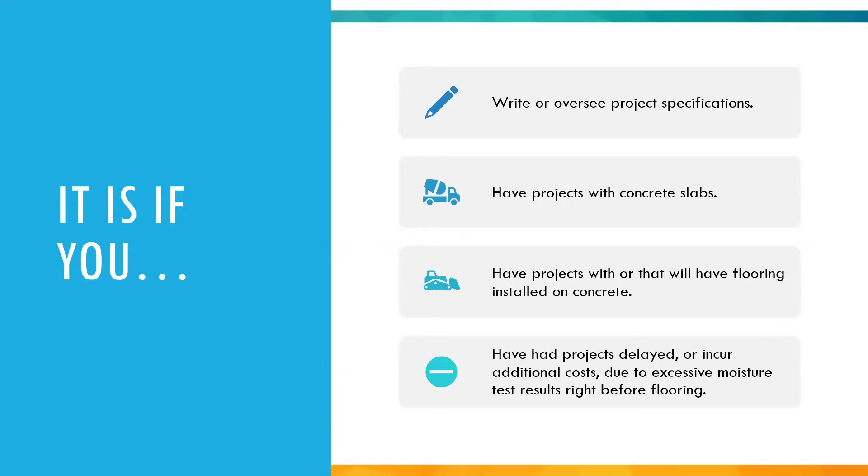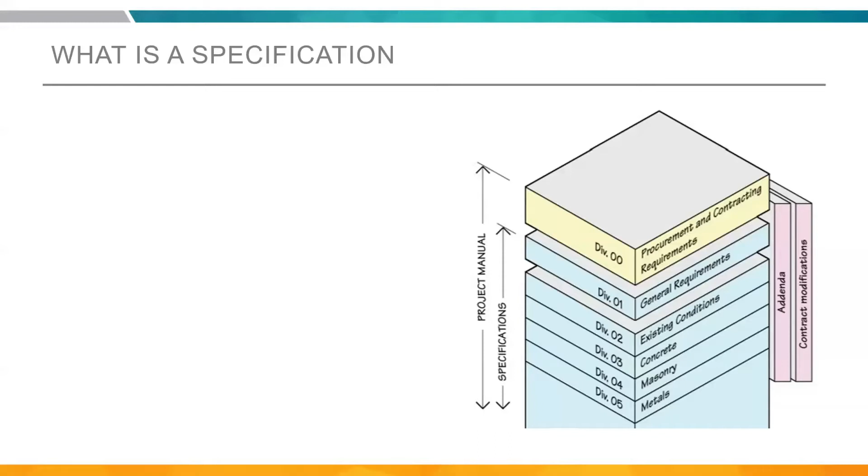Now, specification. So this title, Specification Strategies to Eliminate Concrete Moisture, seems pretty bold, throwing it out there. But before we go on, I really want to set the stage. What our frame of reference for a specification is, and this is not to impugn anybody's intelligence. It's just, again, some really hardcore reminders of really what the specification is supposed to be. Now, if you get into the CSI literature, they'll describe a specification as the written embodiment of the work, the project. But one of the documents, a document specifically written for specifiers, describes it as the written communication of design intent to fulfill specific project requirements. So if you take that particular description of a specification, regardless of what it is you design, you can wrap that definition around anything, whether it's civil, whether it's structural. You can still apply that to that design.

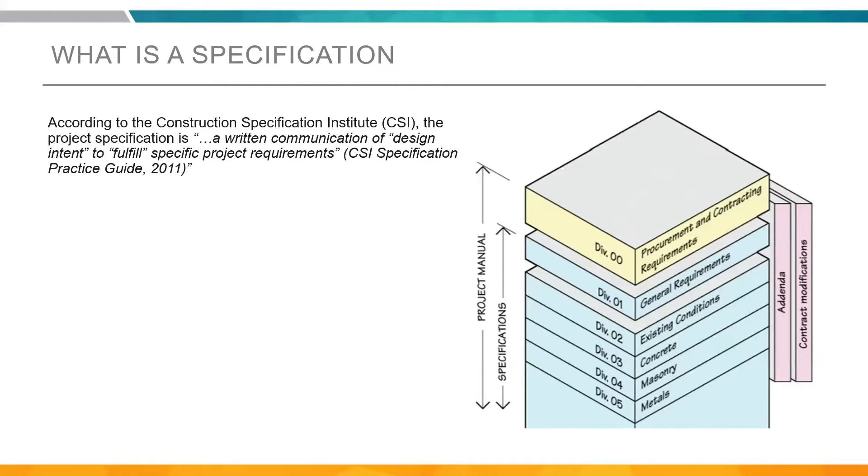Now, another perspective, getting into the actual project. And so now we're going to differentiate between a specification that is flat, lifeless, an office master, a third-party subscription service like MasterSpec or ARCOM or SpecLink, and nothing against any of those organizations, but when those specifications are residing on their system, or you have an office master residing on your server, that's not really the specification we're talking about. We're talking about the project specification, a named project and a project manual. And the reason why we differentiate is because in many cases, once that flat, lifeless spec goes from the server to a project, it takes on legal ramifications. It becomes part of the contract between the owner and the contractor.

And one of the often used documents under general conditions, specifically for structures, is the AIA A201 general conditions. And in that document, it clearly states that the architect and their consultants, perhaps a lot of you out there, shall be deemed the author of the specification. So put another way, it does not matter where the source came from for a particular specification. It does not matter. For that project, the architect and their consultants wrote it. So just keep that in mind from a legal perspective. The way something becomes a contractual obligation for a specification, it doesn't matter if it's a copy and paste.

It doesn't matter how it got in there. For that document, for that project, the architect and the consultants wrote it. And because of that, there's some legal safety net implicit due to the Spearin doctrine going back almost 100 years that accrues to the contractor.

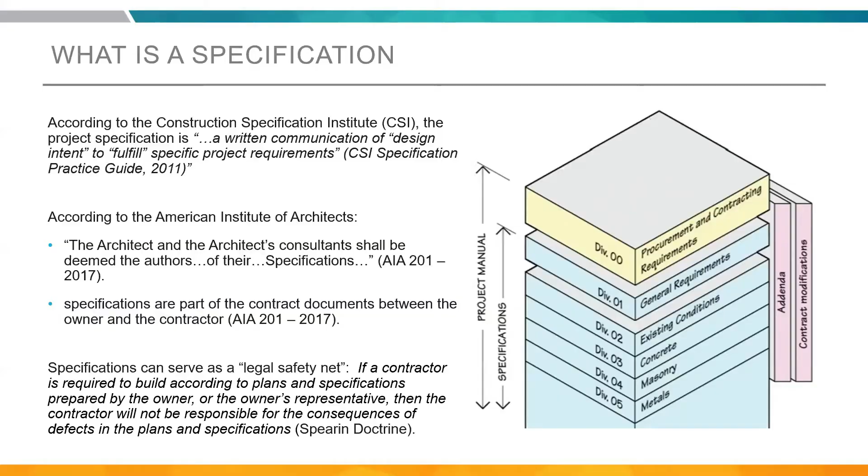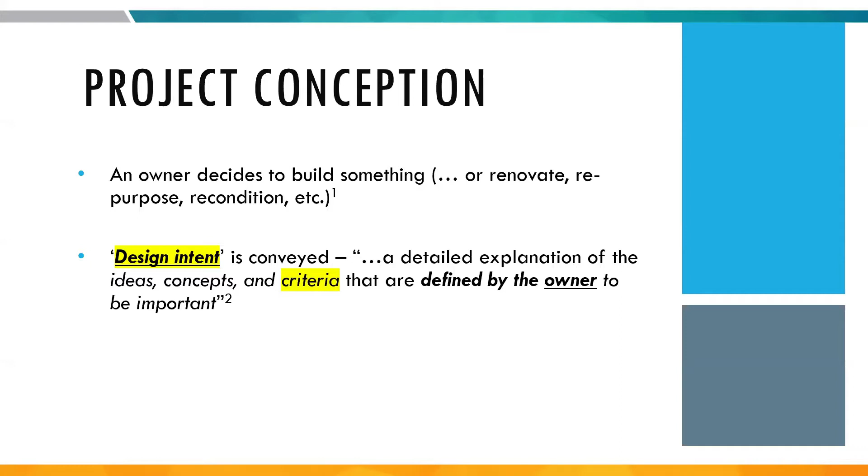Okay, so what drives all this? Well, in the beginning, somebody decides to build something. A client decides to build something, renovate something, repurpose something, build something from the ground up. They come to a design team. The design team designs the structure, and so somebody conceives of a project, and it's in the process of specifications. It's that early on that the design intent is supposed to be conveyed. It's supposed to be expressed in those specific project requirements.

And again, from the concrete world, a lot of things are designed in a silo where you have the 03 specification section done possibly by an offsite consulting engineer, and then at some point in the future, they get married up with the other spec sections of the project. But that's irrespective. The whole design intent and the requirement for the owner, they don't see it that way. They see it as a seamless process.

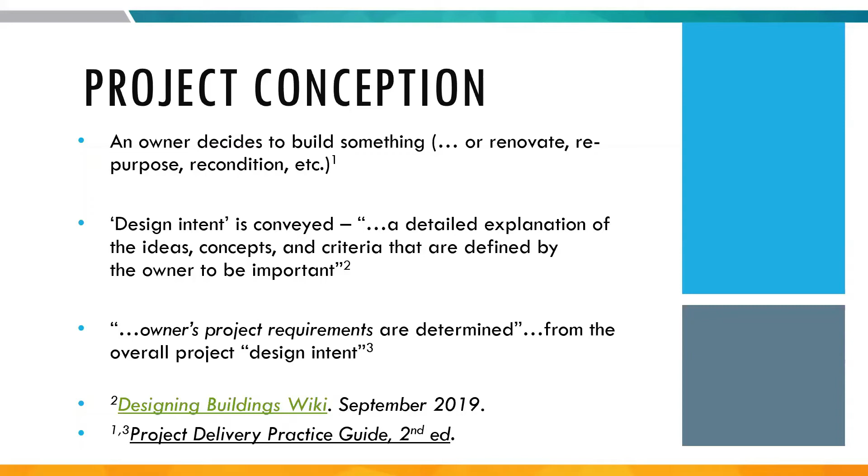And so if something's missing across any of those sections, or if something's not spelled out, then it could lead to unfulfilled expectations. And the better those requirements are understood, i.e. time, delivery, expectations for the project schedule, the higher probability that the owner is going to be satisfied, that the project is going to fulfill what they expect. It's going to be a success. And if something is not effectively addressed, the higher probability that those requirements will not be fulfilled.

And it's not just enough for the contractor to build according to the project manual. That's pretty much defined as quote unquote all claims resolved. But the literature for projects tells us that it's not just enough for the contractor to do all that, but they also must do it on time and within budget. And if any one of those three things are not satisfied, then by definition it is an unsuccessful project.

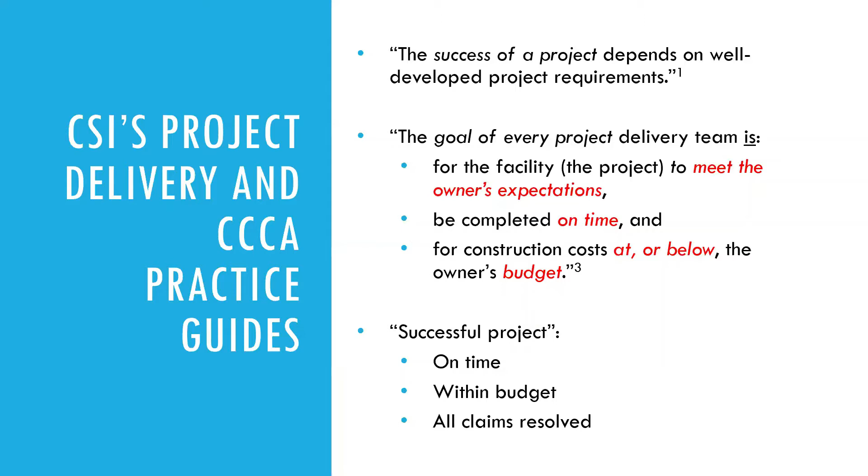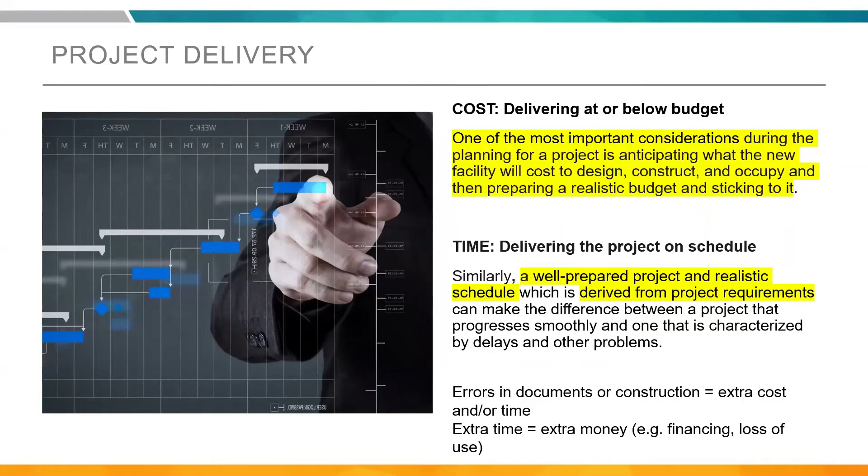So the completeness and accuracy of the specs is critical to be able to fulfill those three things, because not only does it affect whether or not the resulting end product is actually what the owner wanted, but the specifications and drawings are also used for bidding. And if they're incomplete, there's a good chance that something may be missed, something may not be taken into account, leading to maybe future change orders and cost, or extra time in the contract. So again, accuracy and completeness are critical for overall success of the project.

Now, just bear with me, because again, I've got to try to marry the concrete side with the flooring side. And here's some examples of how things start getting skewed once a lot of you have done your work and left the project. First of all, as a reminder, the architect and their consultants are the author of the spec. The other thing the spec language reminds project design team members is that just because a material is inexpensive doesn't mean that being able to incorporate it into a project is also inexpensive.

As an example, there are many different kinds of flooring systems that are fairly low cost for installation and also acquisition. But when it comes time to install, if there's a high moisture test, then you have to go to moisture mitigation. That cost for flooring may double, triple, or quadruple. That's why you get called to those meetings, because that project is staring down the face of a very, very expensive topical moisture mitigation system or project delays.

Another thing the literature tells us is beware of bias that might be embedded in manufacturer specs. Now, regardless of what you specify, this pertains to all manufacturers, obviously that relate to flooring as well. But it's a reminder: beware of bias. Actually read the wording and ask yourself, is this really a requirement? Or is this a means for that particular manufacturer to try to drive another value line through a component? In flooring, it might be that manufacturer requires their adhesives to be used.

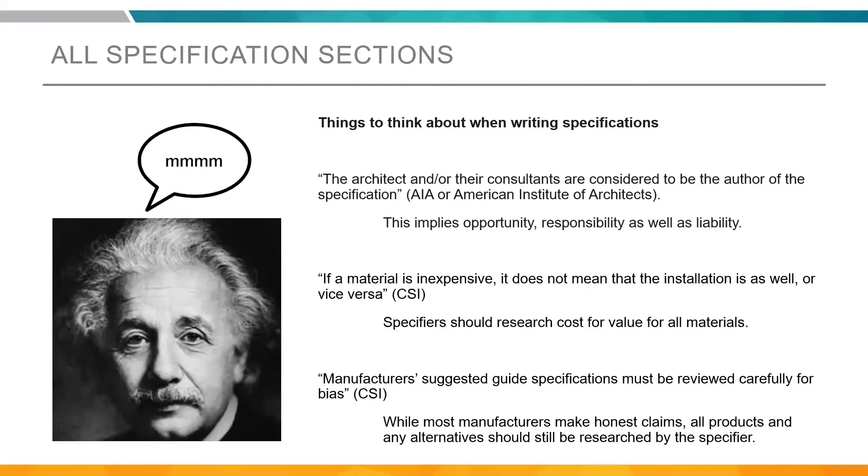Well, is that really a requirement? Because there's only a few manufacturers of adhesives on the flooring side, most of them private label for all the large manufacturers. Or is that just an attempt by that manufacturer to sell another SKU? So just keep that in mind. There may be embedded bias that you must be aware of and take into account as you look at specs, especially if you get it straight from a manufacturer or a third-party subscription.

Now, this does have pertinence to basically every single spec section. The literature of the specifications says that reference standards are incorporated as if they were written in their entirety into the spec. So keep that in mind. I know, especially on the concrete side, there's a lot of references, and a lot of them have to be there. But just keep in mind that a reference standard incorporated has the same legal effect as if it was copy and pasted in its entirety.

So if things start going down the path during a project and questions start being asked, things like install per manufacturer's instructions, if those instructions weren't fully looked at prior to moving down the project, don't be surprised if something manifests down the road that people didn't expect.

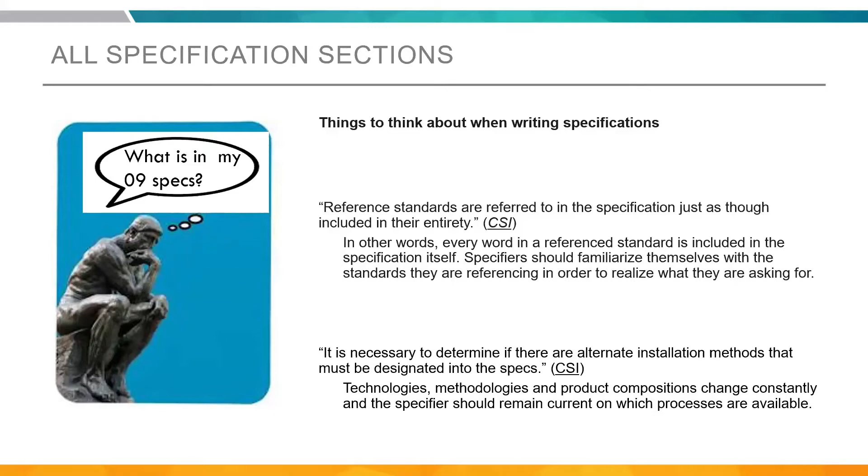And then lastly, installation methods. Again, more slated to flooring, but it does relate back to the concrete side. What the specification literature says is, if your project has conditions that do not meet the manufacturer's requirements, change the installation instructions. As an example, if the concrete moisture is reading too high, what the literature for the spec writer says is we'll change the installation instructions. So all we're trying to do is step back and take these things into consideration well up front in design, so these things don't occur too late in the project on the back end.

Now, again, if you've ever been called to one of these meetings before, heard presentations before, or been involved with projects before, you may have been faced with this comment: we can't install a floor because we can't get the warranties. This is probably one of the most prevalent comments I've heard in the past 12 years. Well, if the concrete moisture is too high, we can't get warranties. So I'm going to address that.

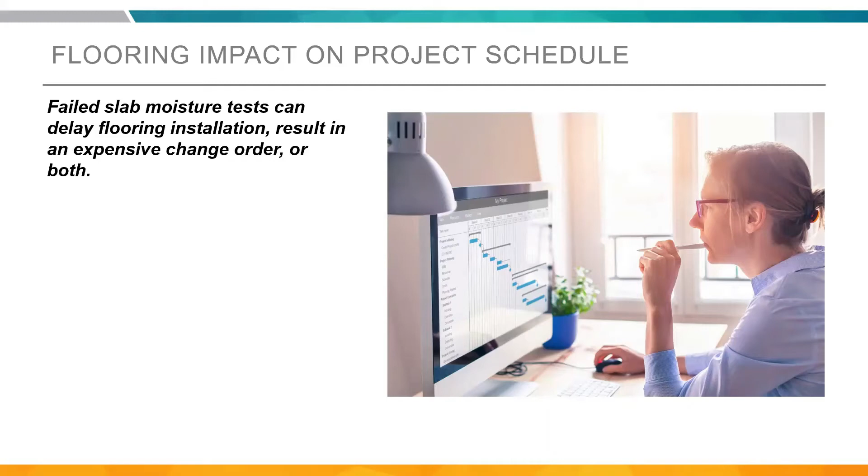Well, the reason being is now the press is on because flooring isn't just its own sub-element that does not impact other elements. It is its own element as far as the macro critical path. So a high moisture test can delay one of those little blue lines. But flooring in the overall schedule happens very close to substantial completion. In some cases, it's one of the last things that occur because the project doesn't want all the other trades walking in and trashing the floor. So if that flooring is delayed close to substantial completion, not only does it delay the flooring install, but it can also delay the overall project delivery.

I know of a project in the northern part of Cleveland where the flooring was delayed for over 5 months. The university did not have the moisture mitigation money. They decided to wait and retest. A 5-month delay, which equates to potentially almost losing that facility for 2 semesters. So just think about the cost of that.

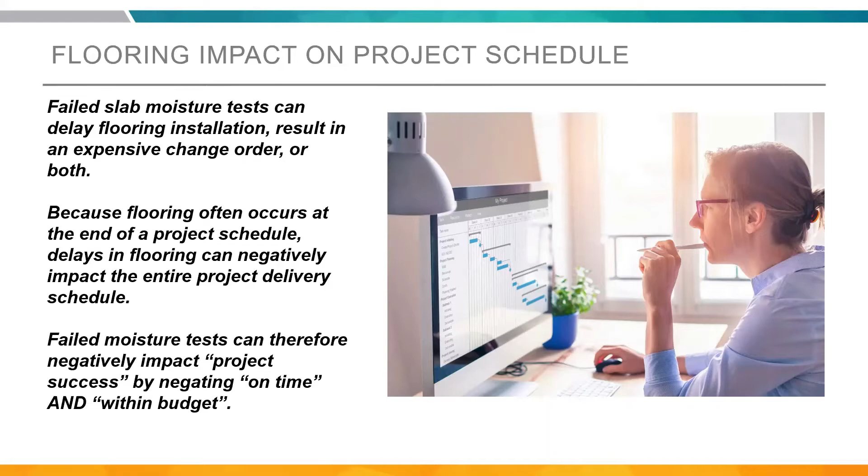Again, think of yourself, if you've ever been asked to one of those meetings, you're sitting there, or people from your organization are sitting there, and you're hearing the project manager or the owner's rep saying, we expected to start flooring 3 months ago, and this moisture is still too high. That's why it's so critical, really, to think about this in the specification, in project conception, not right before flooring. Now it's too late.

Okay, so I mentioned some references. What kind of references are we talking about? Well, on the flooring side, there's a lot of references that come into play. Basically, every manufacturer of flooring has their own reference. There's ASTMs out there. And a lot of these are written by consensus bodies. Now, granted, a lot of you have done your work and moved on, but now this is what's starting to play out with you not being there. And what people don't realize is a lot of these organizations are made up by the same manufacturers.

So it's the flooring industry that came up with the idea that you have to test for moisture prior to installing flooring. It's the flooring industry that sends people to these various organizations. I mentioned I'm on the ASTM for flooring, and that's ASTM F06 committee. And that's like 156 people, most all from flooring manufacturers, adhesive manufacturers, moisture mitigation manufacturers. So in other words, they write their own standards. They write their own resources. Just like if you go to ACI, there's a lot of concrete and engineering people, as it should be.

But again, keep this in perspective. The flooring industry was the one that came up with the need to moisture test prior to installing flooring, not the concrete world. And the flooring world writes the references and the ASTMs they hold themselves accountable to. But despite all that, and despite those being consensus documents, in most cases, the individual manufacturer's literature actually is the one that takes precedence. And so, regardless of what kind of building you may be involved with, if they're installing flooring, there's probably something moisture sensitive.

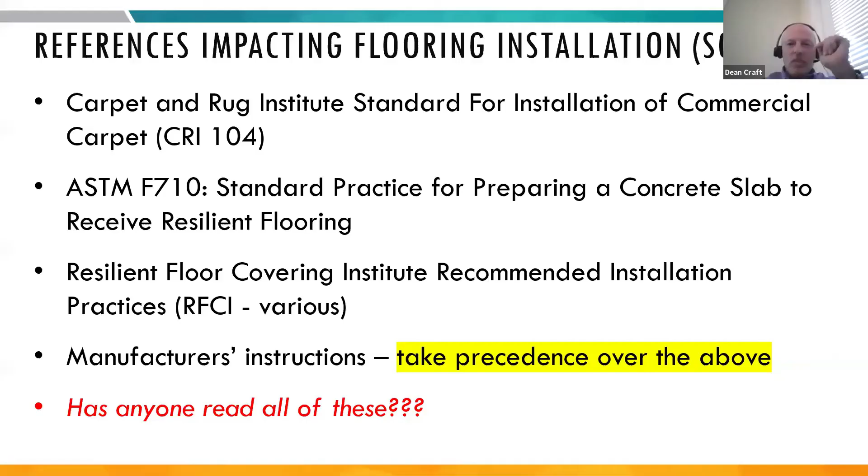So what test are we talking about? And so this is where especially the engineering minds out there, the process folks out there, start really paying attention. Okay, one of the things I was talking about when there was a little bit of difficulty there is that the references, at least from manufacturers, are basically written by the same manufacturers. In other words, they go to the committee meetings, not unlike ACI, but just keep that in mind. So that standard of care for testing for moisture derives from the flooring industry, not from the concrete industry. The quote unquote standard of care for setting a certain limit also comes from that industry.

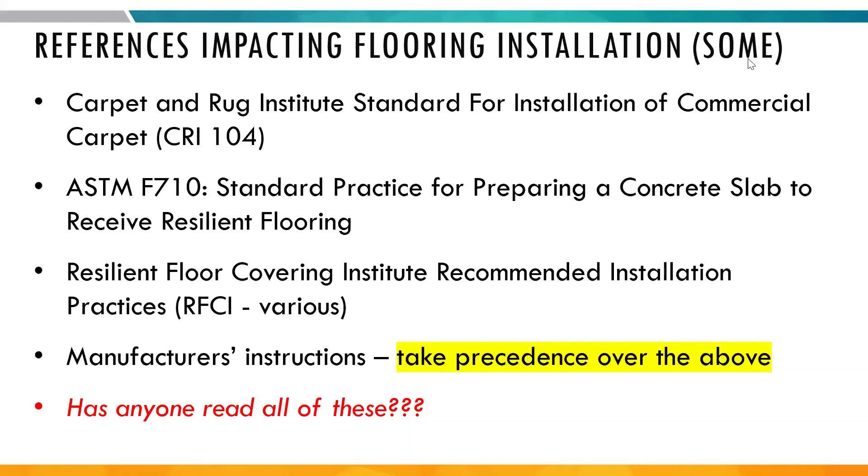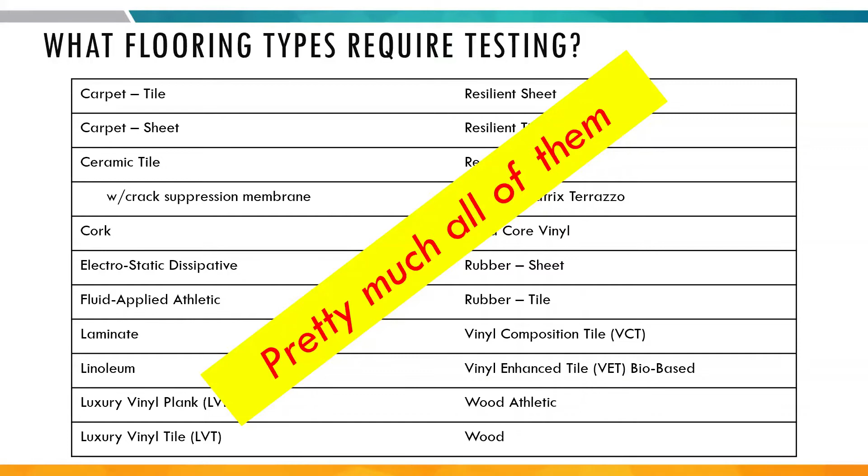So again, keep that in mind, that when you get asked questions about why your concrete can't perform to something, the concrete industry didn't come up with that. The flooring industry came up with that. And pretty much all flooring is susceptible to some moisture limit. So basically, if your feet touch it, it's not bare naked concrete, then there's probably a moisture limit. So the moisture tests you've probably heard about are the calcium chloride or the in situ probe test, the F2170 RH test. The most often used is the relative humidity test.

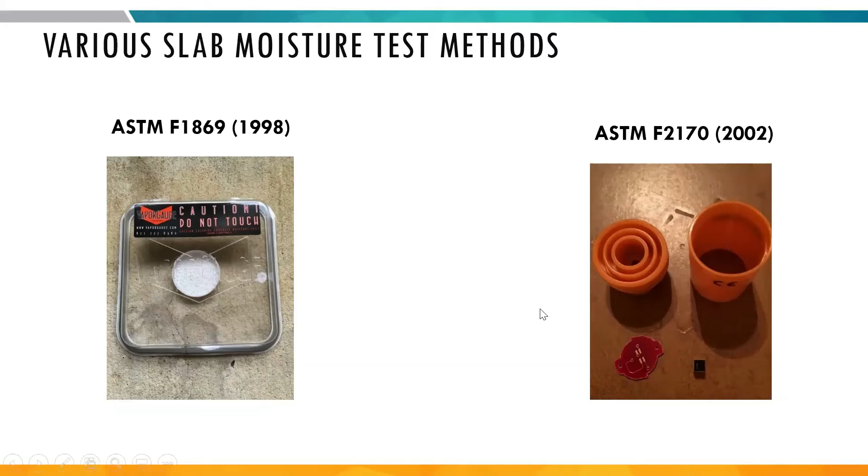And again, 1 per 1,000 square foot. So just take a quarter out of your pocket, if you have coins, and put it down on the ground and say, okay, that's where the test goes. Now, not only is that something that's codified into the ASTM, the area, the size of these devices, but this is what the standard says is supposed to be the climatization.

When these tests are occurring, and I know this does not occur in most cases, so just be aware, if you go to a job site and they're doing these moisture tests and it's not acclimatized, then those results are invalid. Whoever's doing those tests is doing them wrong. And I'm pretty sure you've been called to job sites or involved with projects where you know for a fact that the space is not acclimatized, but they're already doing moisture tests. Those results are invalid. The standard says it must be at the conditions of occupancy beginning at least 48 hours prior to the test through the conduct of the test.

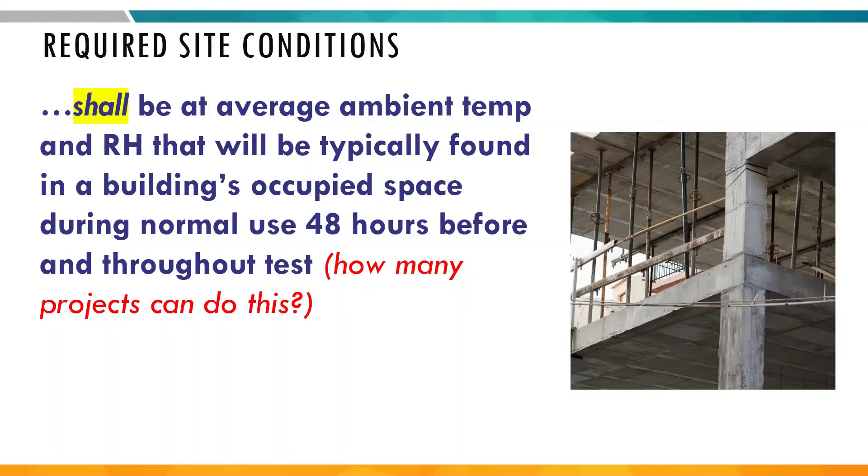This is not torpedoes blowing in heat, elevating the humidity. This is controlling the HVAC. This is controlling the humidity and the temperature. Also the substrate temperature. So especially now we're in colder weather, if you're on the second or third floor and they're testing for moisture, even if that space is acclimatized but the space below is not, measure the temperature of the concrete. The temperature of the concrete is also supposed to be at occupancy conditions, not much colder, which is usually the case.

Now, why did I spend so much time on the size of the device itself? Because the standard says that not only are you only testing the exact time of the test, that instant point in time, but also you're only testing the exact location. So all that's being tested, per 1,000 square feet, is less than the diameter of a quarter in that 20-inch by 20-inch square. So as we think this through, and think about how this relates to flooring and adhesion warranties and moisture warranties, all you're testing in most cases is less than the diameter of a quarter.

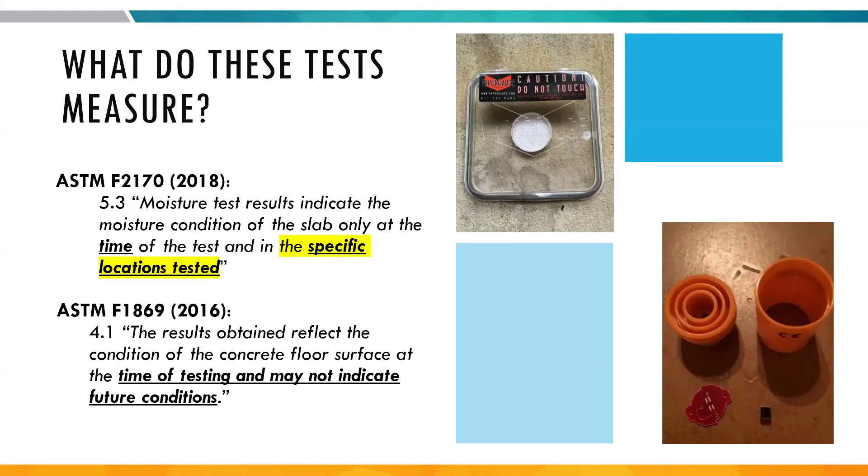Now, a big misconception across a lot of attendees to the presentation. I've been asked this many times. Anecdotes or vignettes, people say, well, we placed concrete in the summer, had a dry winter, the fall was a little wet, then we started trying to get the building closed in, some rain, snow, whatever, finally got it closed in, temp heat, got it watertight in March, April, got the HVAC running, started testing in June, and the moisture content was off the charts in the 98% range. What's wrong with the concrete?

Because a lot of people have been led to believe that the date of placement is a primary driver for being able to pass these tests. Some people have gotten in their mind that, well, 30 days per inch thickness of concrete and the concrete's dry. Well, the literature does not say that. It's actually never said that. In fact, the guiding document for slabs to receive moisture-sensitive flooring actually talks about the last wetting having the greater impact even over the initial water cement ratio. So efforts to engineer out the water, getting down to a 0.42 or 0.41 or 0.40 for an interior slab, really are not conducive to passing a moisture test, because they do not mitigate that last wetting.

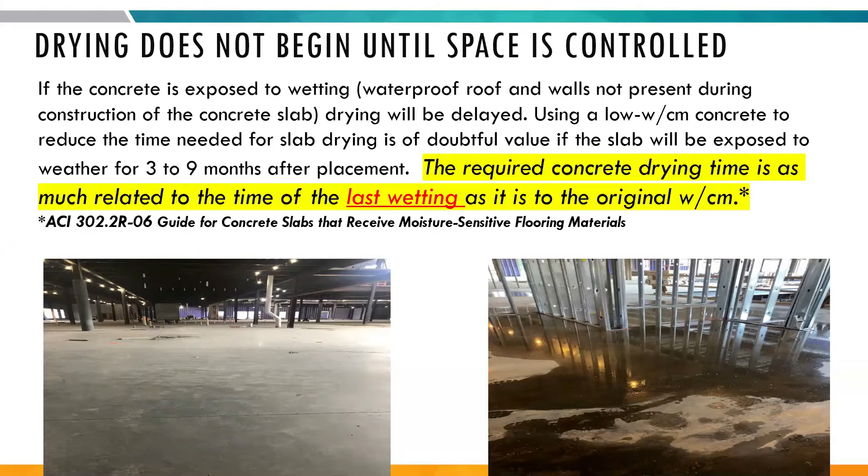What is the last wetting? Well, ACI is very clear. Waterproof roof and walls not present when the construction of the concrete slab occurs. What could be a wetting? Well, a wetting could be rain, sleet, snow, burst pipe, wash down. It could be high humidity due to the torpedoes. It could be dew point. Most projects go through dew point or frost point cycles every single day, and they don't even realize it because it occurs either so early or so quickly. All of that keeps the moisture content high as far as the humidity probes go. So just keep that in mind.

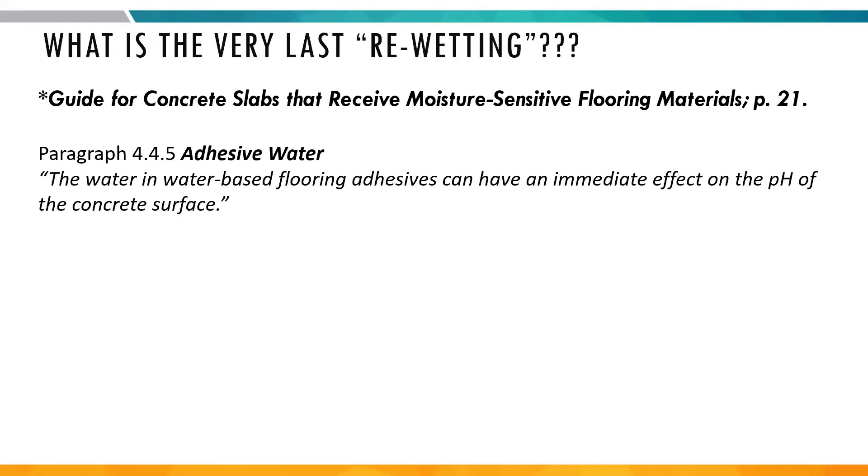Also, the same document, ACI 302.2, states that not only is the last wetting what drives the moisture test results, but there's another last wetting that most people aren't giving any consideration whatsoever, and that's the adhesive itself. So even if you were able to deliver a bone dry concrete slab, ACI 302.2 talks about the residual moisture in the adhesives themselves having enough liquid to induce residual alkalis, unreacted alkalis, to go into solution and create a change in pH.

Well, if there's enough moisture to create a residual pH solution, what is that doing to the humidity of the concrete? It's elevating it. Same thing with self-leveling underlayments. So again, from a process mind, how does testing for moisture and then slathering it with a liquid have any correlation whatsoever to future adhesion?

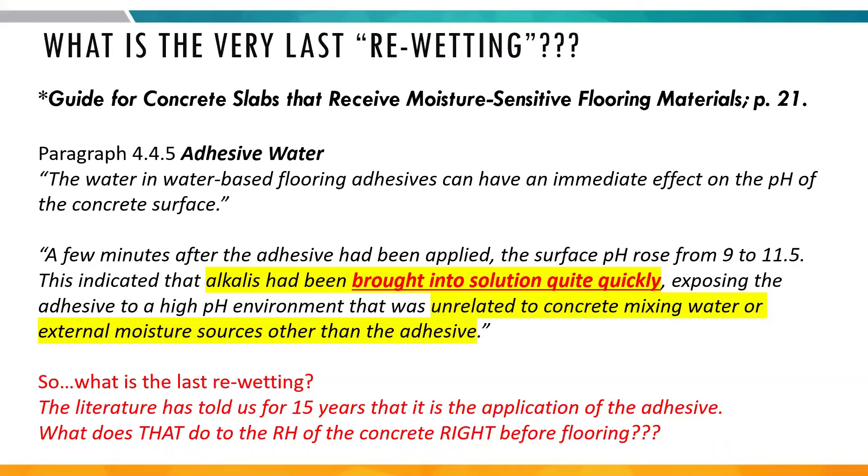This is also from an ACI magazine, Concrete International. It was a longitudinal test done concurrently. In 2011, they placed some slabs down in Dalton, Georgia, and ran for 13 months. After 13 months in a warehouse, not acclimatized, the test didn't pass the limits for the flooring. Ran concurrently in an acclimatized space, 7 straight months, didn't pass. And that's the conclusion right there.

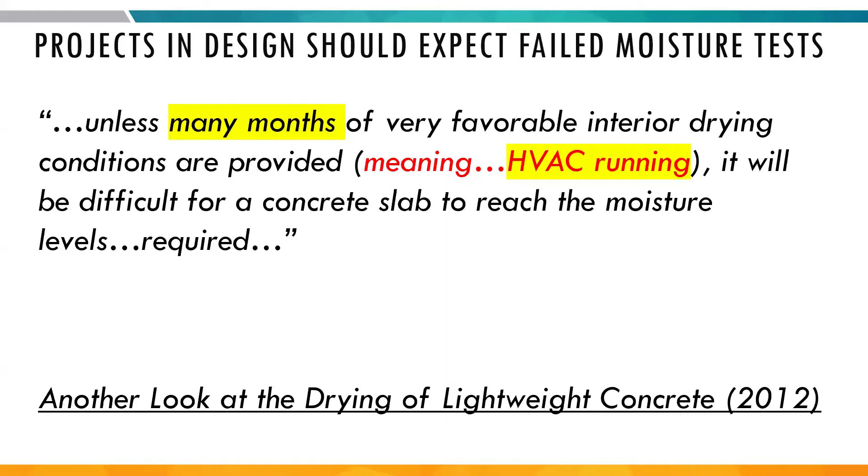This conclusion right here is what designers in schematic design need to keep at the forefront in thinking about concrete moisture leading to flooring. If your project does not have this, don't expect to pass the moisture test. Otherwise, don't be surprised if you go through this over and over and over again.

Now, ACI 302.2 also states, and has stated for going on 15 years, that there actually is no relationship between the RH of the concrete and the adhesion of resilient flooring. This is not me writing this. This has been in there for 15 years, and it's not just solely related to the RH test. It's also related to the calcium chloride.

So basically, if you get called to these meetings, you're being asked why your concrete can't meet a threshold limit imposed by the flooring industry for an issue that has no relationship to the adhesion of their flooring products. Again, that's been in there for 15 years now.

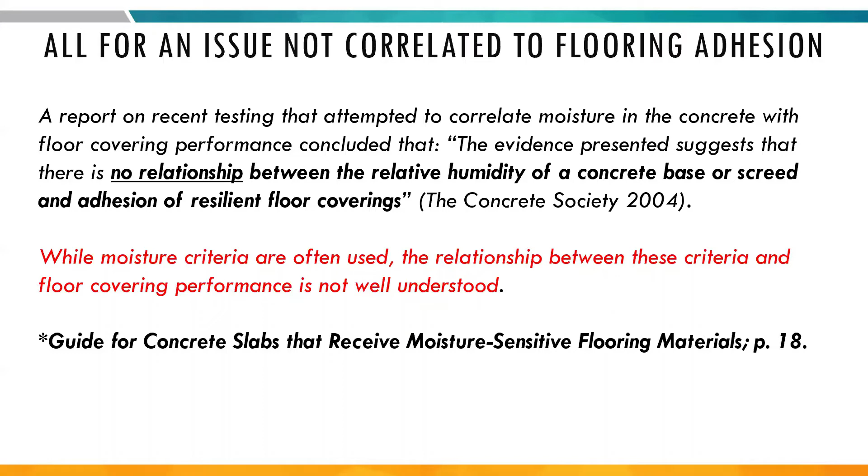Warranty. Then you hear, well, we've got to do it for warranties. Well, a simple look at flooring manufacturers' warranties clearly points out that moisture is not covered. Even if you meet those moisture tests, any issues that evolve after the fact due to moisture are not covered. This is just a sampling of 4 different warranties across the flooring industry.

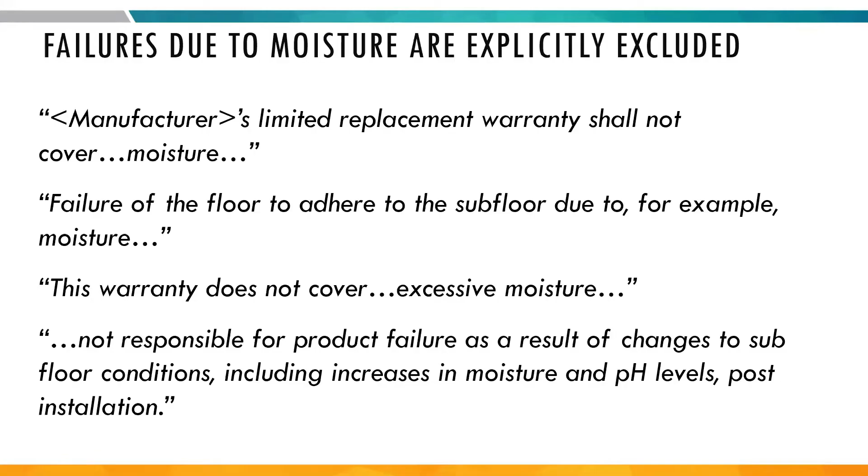So if you're wondering why you're getting called, it's because somebody's looking to put $5, $6, $7 a square foot on top of that concrete, by the way, well in excess of the cost of the entire slab per square foot, just to be able to put the flooring down. That's why you're being called in there, because they're staring down a significant change order in money and time.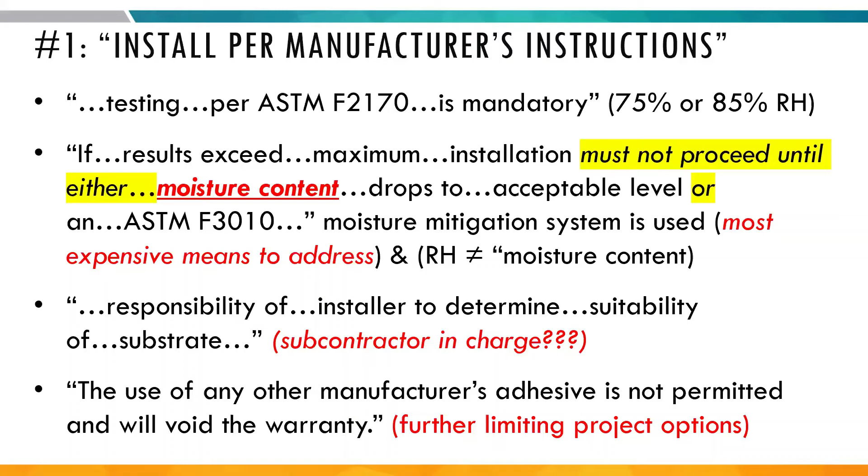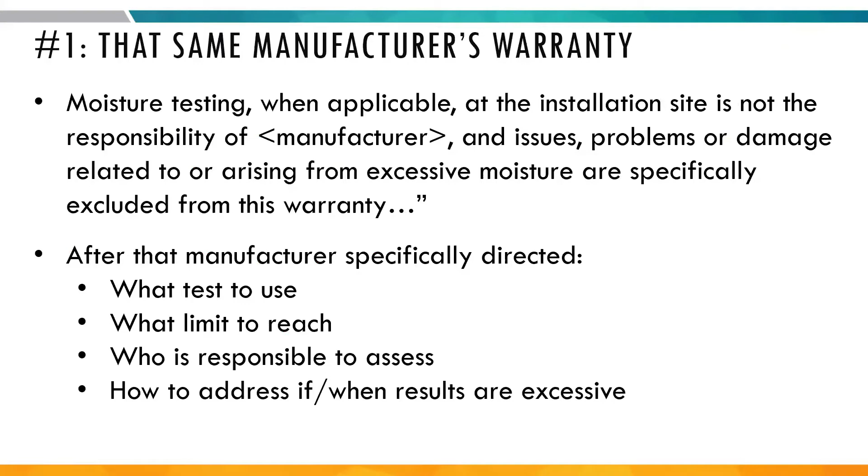This same manufacturer does not warrant for moisture. And in fact, anything to do with excess moisture is specifically excluded, irrespective of the fact that they've already told them how to test, who decides, what test, what you can do and what you can't do. It's not limited to that one manufacturer.

This is a resilient sheet used in healthcare, institutional, schools. That's the kind of flooring product you see. Think linoleum. Great product, not a very expensive product in the whole spectrum of flooring. But the language of their spec, again, requires moisture tests that most likely the concrete cannot pass. And if it doesn't, it requires a moisture mitigation, most likely a two-part epoxy.

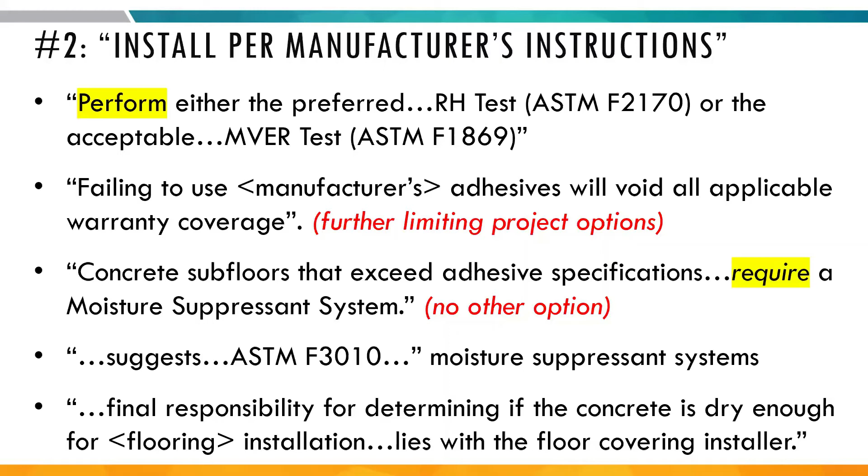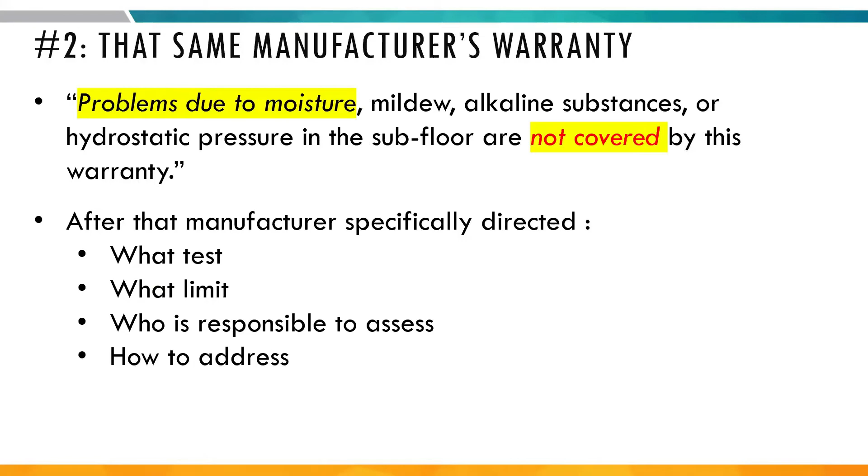So if you wonder why this gets emotional and why you keep getting called in, it's not because your concrete's performing badly. It's because that project is now delayed and staring down a significant change order in cost and time. All for an issue that's not covered by warranty, all for an issue that's not even related to adhesion. And then lastly, about ASTMs and about these standards.

Just recently, and this does kind of go back to you, the guiding document for designing slabs to receive resilient flooring, other than the ACI document I was talking about, is ASTM F710. That is a standard practice for preparing a concrete slab to receive resilient flooring. That's the document that requires moisture testing on all slabs. It was first published in 1998, and in 2017, a new paragraph was added.

And that new paragraph puts it on the design team, which many of you would be involved with. It makes it their responsibility to determine if a sub-slab vapor retarder was present, installed correctly, and is it still intact. And then it's also the design team's responsibility to take the moisture test results, determine if there's an issue, and then the design team determines how to address it.

Well, people could easily say that conflicts. Remember I said references may be a conflict. What's actually in these references? What do they say? You could easily say that conflicts with what I just told you about what these manufacturers say. No, because the standard also says that nothing in this standard shall supersede in any manner the manufacturer's instructions.

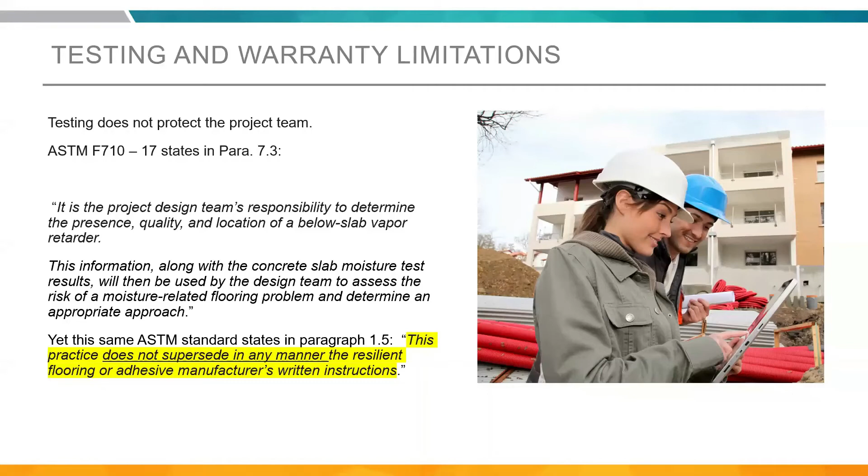So this document is also written by the manufacturers. So even though they put this on the design team, they still reserve the right to themselves by this paragraph right here. So make no mistake, it always stays with the flooring industry with this particular process. So what do you do? Well, install per manufacturer's instructions obviously will be in the 09, but again, think about the 03 spec. If the 03 spec does not take steps to head this off, then don't be surprised if you get called into it, because that's the way the process has evolved over the past 20 years.

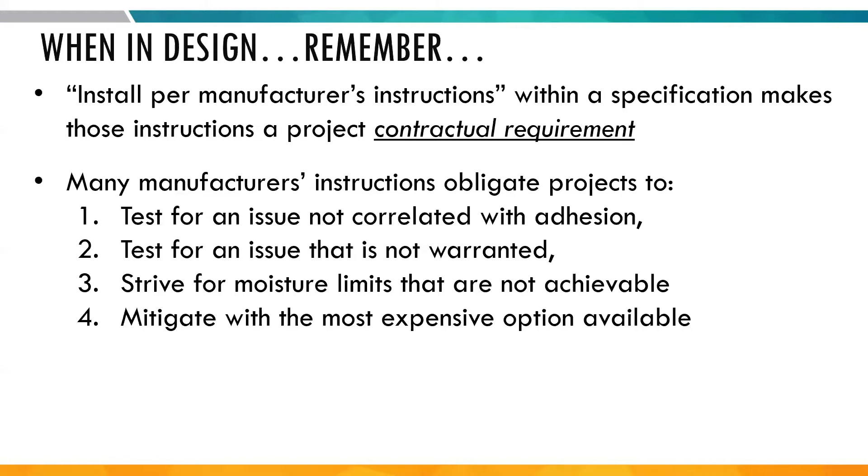All for an issue driven by the flooring industry. A moisture limit that most likely concrete cannot pass. And by the way, concrete being at 100% humidity is not bad for the concrete. For an issue that's not even related to adhesion, and for an issue they don't warrant.

So the specification strategies that we try to drive into across various specifications: one, everybody's worried about the warranties. And so this first recommendation really goes to the warranties. Granted, this is out of your bailiwick, but still, it's part of the project. It's something to keep in mind. And one of the things the project team, the design team, can do is simply require the warranties to convey.

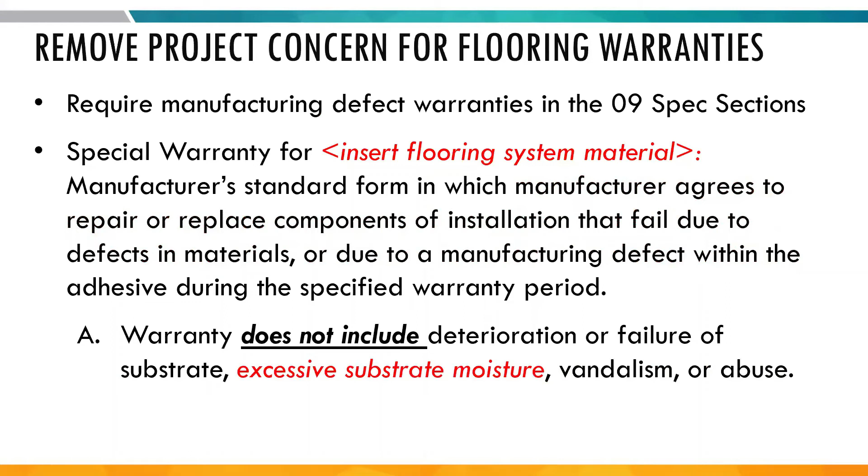This language right here is from an architect in the Cleveland area, as it happens. They've used our admix before, and to make sure there was no question about whether or not warranties were going to convey, they just put it in the 01 portion of the specifications of the 09 products and said, manufacturing defect warranty shall convey, and we don't expect moisture to be included. They didn't stop there. They put our product in the 03, but in the 09 they also required the warranties for installation, quality manufacturing, and workmanship.

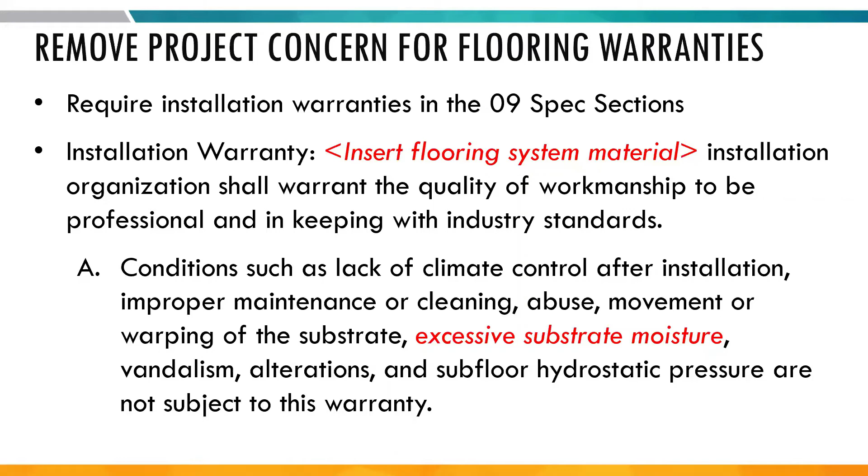Again, moisture not included. So there are ways, because remember, the architect and their consultants, you and them, are the authors of the spec. You decide what goes in the language, not a manufacturer, not me, not a different industry. You guys and gals decide what goes in the specification language. So that's one way right there that the issue of whether or not a warranty is going to convey is taken off discussion.

Now, the liability for concrete moisture. This is one of the things that could be done in the 03 section. And one of those ways is just to simply start off with specifying an approach that is warranted to 100%. For interior slabs, all interior slabs, anything to receive flooring, or roof decks, put something in that's already warranted to 100%. If somebody else takes it out, that's their choice.

But this is one of the ways to absolutely head off the entire discussion of whether or not moisture testing is even required or how the project is going to address it. Absolutely in the purview of the design team, not a manufacturer. And if this is incorporated at the same time as that other language about the warranties having to convey from the flooring side, then the project team's liability for moisture and the warranties is now covered, and the owner is going to get what they expect.

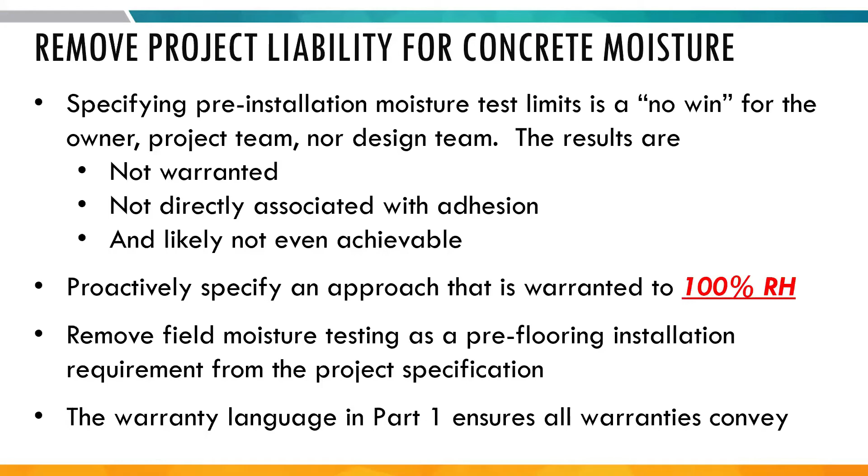This one right here, this would have applications, I think, to any product you might specify. Just be careful with some of the language, or be aware of some of the language. Is some of the language really necessary? Is it necessary to have "use an adhesive as recommended by a manufacturer"?

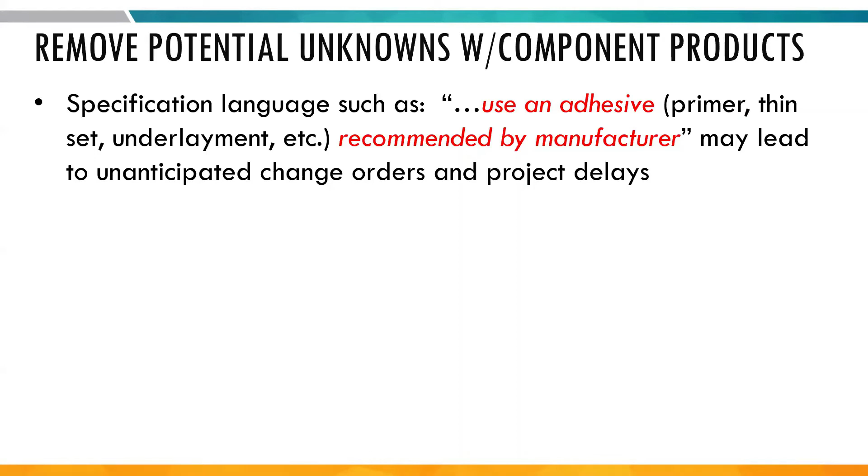Or is it better to use more open language, something like suitable for substrate conditions and compatible with flooring backing, or for whatever product you're doing? Just keep in mind that changing the installation instructions does not necessarily mean a total rewrite. Sometimes it's just tweaking it to open it up a little bit for other products, as opposed to saying or equal. Because really, as everybody knows, if a branded product's listed or equal, the default is going to be the branded product.

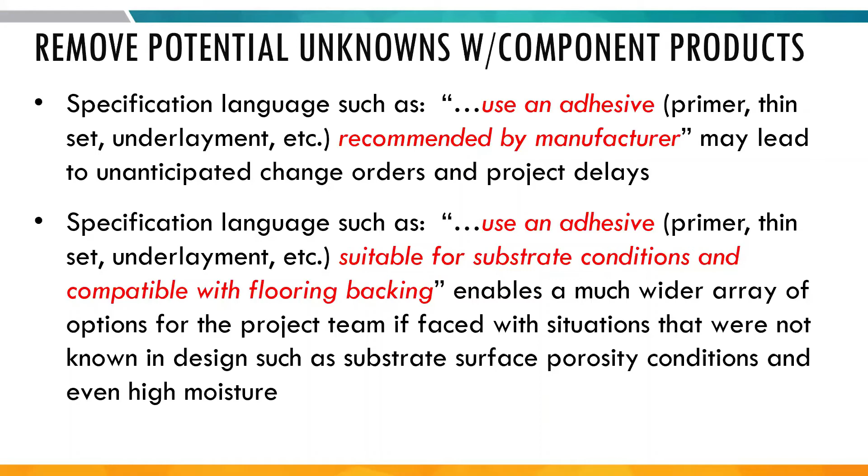Most people are not going to follow the or equal. That's just the way it's going to work in the bidding process. But if you have language like this and something changes, some new information comes out once the spec has been published, this allows a little bit of an audible to occur. So keep that in mind.

And then lastly, this is also something we're seeing now too, where projects are elevating this even higher into the summary of work, Division 1 spec section. And here's the case where the admixture was used. As you can see, they're saying, hey, this product is going to be used. This is what it does. All subsequent flooring contractors bid accordingly. Again, the architect and their consultants wrote this, not a manufacturer.

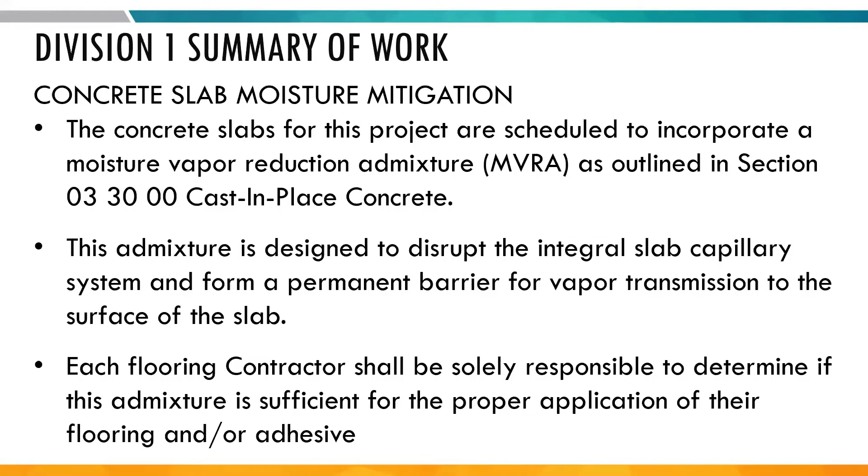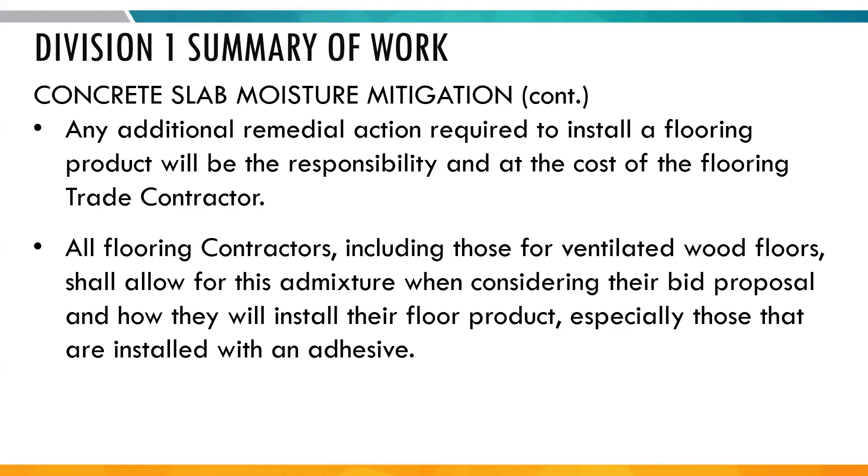Then they say, flooring contractor, if you think you need some kind of remediation to get your flooring systems to bond to this kind of concrete, sure, you can do it at your expense. And by the way, the owner is not paying for moisture testing, and we're not changing out the adhesive. If it's going to be a direct glue down, we're not going to accept a double-sided tape. We're not going to accept something different. So make sure you do your due diligence.

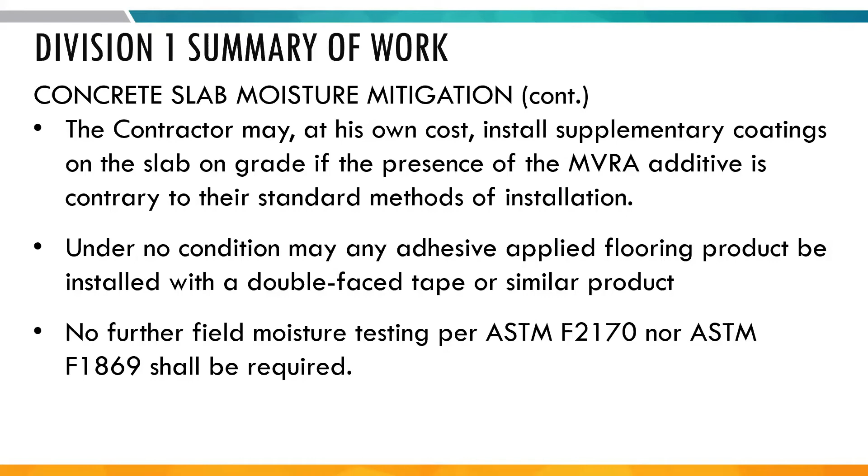Here's just some examples of how projects have grappled with this up front in the document phase, so that when it gets time to install flooring, people like you aren't ever called back because you're long gone and your work is done. And it's not unusual now during pre-slabs, if the admixture is used, that flooring installation is often discussed. So just think about possibly having a flooring contractor at a pre-slab meeting. We've done that several times now, and it's very, very effective, assuming the flooring contractor is known at that point.

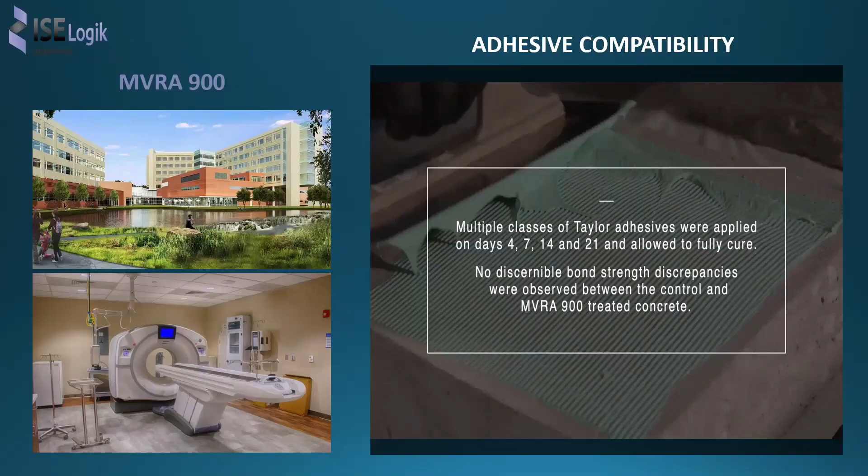And that is critical when it comes time for flooring. That is critical at a pre-slab meeting when the project manager can actually call Taylor and tell the flooring guy, hey, listen, I can already talk to Taylor, and we've already got adhesives if your manufacturer has an issue. Very, very critical. Now, obviously not all products receive the admix.

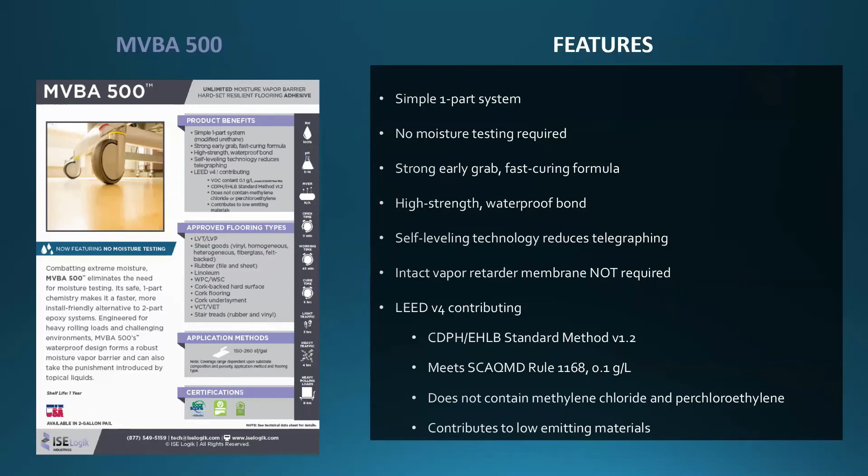This is a 100% adhesive, warranted 100%, does not require a vapor retarder. Can be used for any kind of resilient flooring. What does that mean? All of these kinds of flooring right here. Not only is there this adhesive for all kinds of resilient flooring, there's also a separate adhesive for wood flooring. So to go back to answer the question that was just asked, there are absolutely adhesives out there right now, several different manufacturers, been out for a while, that do warrant to 100%, are themselves moisture vapor barriers and waterproof.

What does that mean? So let's say you have a laminate floor and the person that's cleaning really super saturates the surface and it drips down in between the cracks. The flooring adhesive is not going to degrade. The flooring itself may swell, but the adhesive itself is not going to degrade. So this is one of the options that would answer your question. Absolutely available in the market. Certain manufacturers are going this way, but let me be clear on adhesives.

Some projects, their approach is, we're going to test for moisture and just pick a higher RH glue. In other words, the concrete's 95, so we're going to pick a 98% glue. That is a red herring. When a glue says it's good to 98% or 99%, what it's saying is that glue itself can exist at 99%. It's not saying that it blocks 99%.

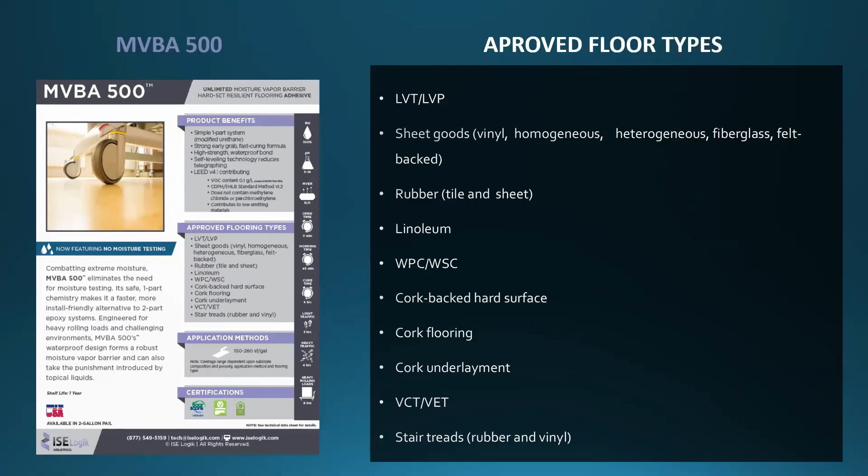So that covers that. And we also have a one-part topical that's probably $2 a square foot cheaper than the two-part epoxies. I won't belabor this one, but what I'm getting at is that there are a lot of options across the spectrum that projects can do. And this example right here, what is the cost benefit analysis? This product was used by Boise State. They were going to use a two-part epoxy, 30,000 square foot.

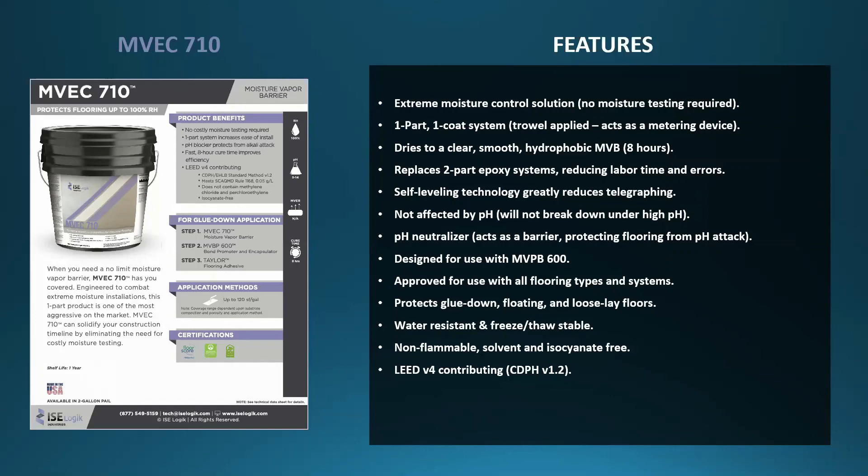And this saved them a week in construction, and it saved them about $60,000, about $2 a square foot. So the admix, we're involved with a really big project right there in Columbus, a very, very large hospital complex, and great ready mix producer, great project team. And on a project that size, it's not unusual for the inclusion of the admix to actually save months off

the construction process. And what I'm meaning is that when you start that project with 100% specification to address concrete moisture, remember that's the document phase. That's before bidding. So when the GC gets all the way forward at some point, 18, 20 months in the future on a large project or a school project, 12, 14 months in the future, and they're staring down, they've got to start flooring because they've got to meet that opening date. Everything I just talked about is gone.

The GC goes, climatize the space, flooring sub, install your floor. That's the process. So everything I just talked about is eliminated. And you can do so, at least proactively for the concrete, by having the admix for all interior slabs and roof deck. And then obviously just being aware that if you're doing any kind of building, it's likely to have flooring. So just keep this in mind.

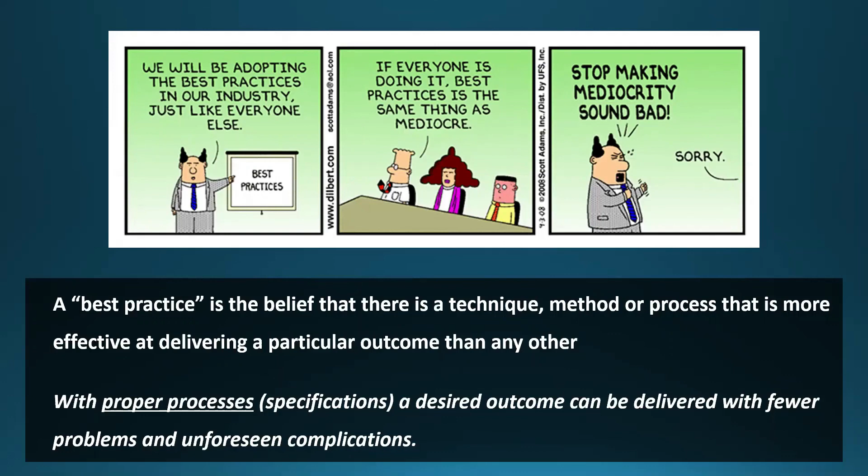So Dean, we have one last question. Go ahead. Perfect. Nano-silica technology is being promoted as an internal cure for concrete designed to hold on to water molecules. Does this type of technology adversely affect moisture drying a slab? Well, with nanosilica, what they're doing is they're creating additional calcium silicate hydrate, because that's really what they're going for when they use nanosilica.

But the internal cure, yeah, it's going to keep moisture in the concrete. But I said earlier that that's great for the concrete. You're going to have less dimensional change. You're going to have more even strength gain, probably higher breaks. Yeah, it would give you a higher moisture content or higher RH test. But if that nanosilica product was warranted, and I know one product out of Indiana, Element 5, goes after kind of the internal cure aspect. But if it's not warranted for moisture, yes, it could delay achieving a certain moisture limit.

And from my perspective, just remember, everybody knows concrete. Mother Nature is the biggest demon when it comes to when and how to cure. It's one of the ones that people often forget. A slight change in temperature or wind or solar radiation can greatly affect when and how the curing process should begin. And a lot of project teams forget that, and it leads to problems.